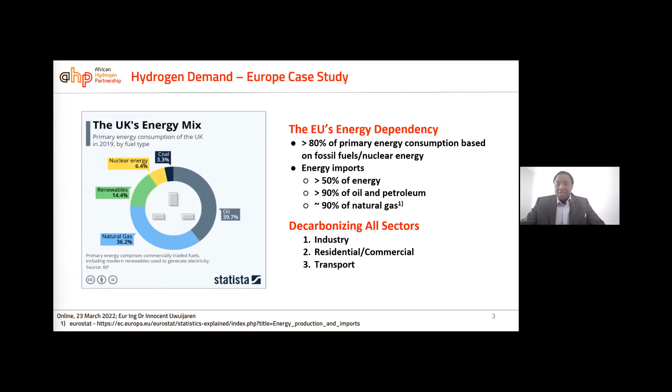All of this creates the opportunity that Africa has in its hands, which means Europe already has a demand. I'm setting the context of supply and demand. Europe already has a great demand on their table. The question is, can Africa be a potential supply on its own to meet this demand? The answer is yes.

You may say, why hydrogen? There are other alternatives that could be used, like electric vehicles. But when you talk of heavy trucks, the potential of electric is quite low because it takes a lot of usage. For instance, if you're driving a heavy truck 200 or 300 miles, you're going to run into many instances where you have to charge.

But with hydrogen, the energy potential is more and can serve these trucks and all these heavy duty vehicles and the shipping industry much better, which means the potential in hydrogen is better than electric for heavy duty trucks, heavy duty shipping, transportation sections, heavy duty trains, and all this heavy duty equipment - they all need hydrogen to power those equipments.

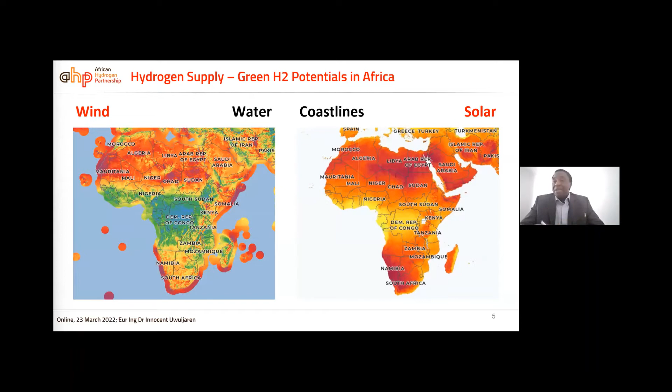That takes me now to the economic benefits. What are the benefits when it comes to hydrogen? Number one is low cost, price-competitive, carbon-free hydrogen. Of course at the moment the price is still on the high side - why? Because of the technology.

But we look forward to the future, say 5-10 years from now, where we can see the price of hydrogen coming as low as possible. In short, some of the different producers are already looking at opportunities of having a huge number of demand at a time, which can bring down production costs. That is actually what Africa should be looking at.

Each of the nations coming together to put together what we may call a unified order at a time, where the quantity and volume drives down the price. That could be an opportunity that Africa can take advantage of.

Also, we have natural hydrogen. Of course these need to be verified. Natural hydrogen is found in the ground - that's what we have to date. But the main study is still ongoing at the moment. With the proof of all those studies, we can understand more on the possibilities and potentials of that hydrogen, which I believe can be beneficial to Africa.

Now in terms of benefits, you can look at the domestic aspect. We can use it as a power backup system for Africa, and also for green fertilizers, green ammonias, and all these derivatives - they can all be valuable in Africa. So we're not looking only at import demand to other nations; we're looking at local use as well, where hydrogen can be very beneficial in application, and within African nations there can also be opportunity to export.

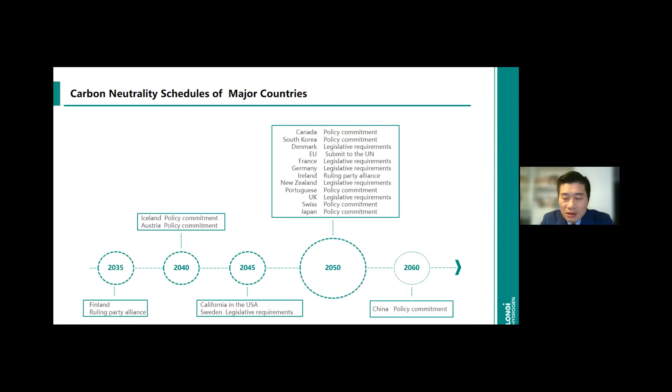Let's see the schedules of major countries of the world to accomplish carbon neutrality. Countries like Finland, Iceland, and Austria have a good environment and less heavy industry, so they take the lead with commitments by 2040. Most developed countries and areas set the timetable at 2050. For China, our policy commitment is carbon neutrality by 2060.

Countries with more than 17% of global GDP have formulated hydrogen energy strategies, among which China and Europe are the most active. China and the European Union take green hydrogen development as the main goal of their hydrogen energy strategy. China has set a goal of 80 gigawatts from water electrolysis by 2030, and the European Union has set 45 gigawatts.

Chile, Middle East Africa, and Australia will become major green hydrogen export markets in the future to meet hydrogen demand in markets such as Europe and Japan.

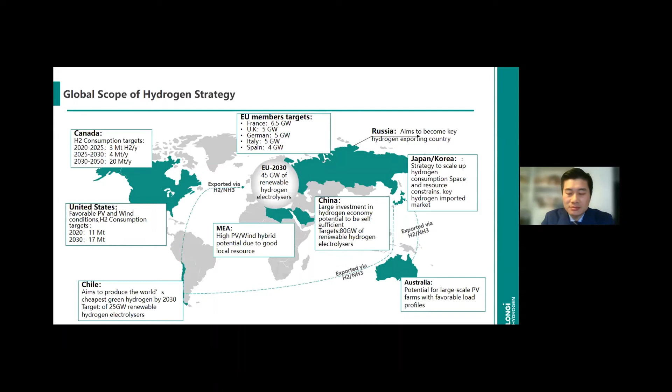Under the consensus of global carbon neutrality, hydrogen energy will make great progress as an indispensable clean energy. In China, the cost of hydrogen production from coal and natural gas is still relatively low. Hydrogen production by water electrolysis is subject to high electricity prices, so far it is still insufficiently economic.

However, we are seeing that as electricity prices continue to decline, the hydrogen cost of water electrolysis will become equal to traditional coal hydrogen production and natural gas hydrogen production. It is predicted that the ratio of green hydrogen in China will increase significantly.

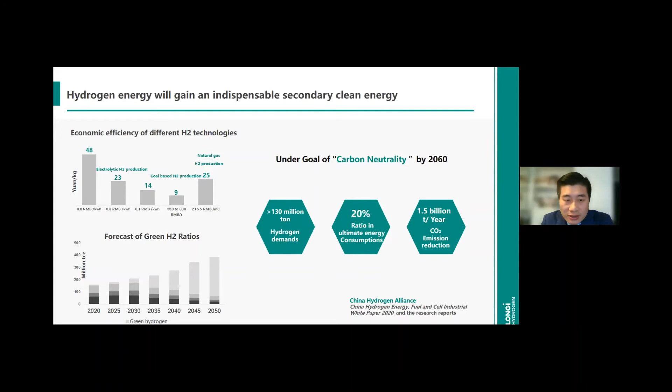Longi has been asked several times, as a world-leading solar company, why did Longi enter the hydrogen energy field? Longi thinks without hydrogen energy, it cannot enter the deep decarbonization process. You can see there are 10 billion tons of CO2 emissions in China every year, and the power industry alone contributed 40% of the total CO2 emissions.

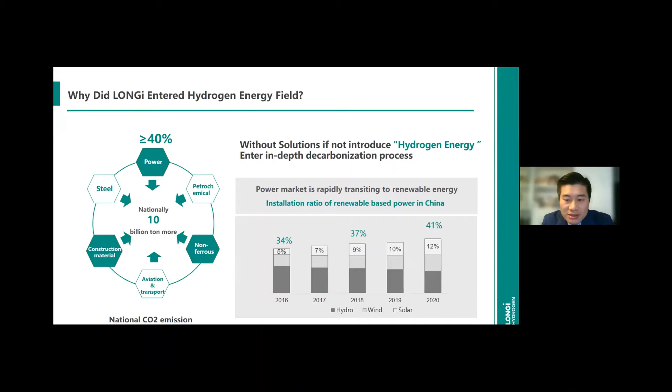China's government has already taken measures to adjust the structure of the power supply. The renewable energy installation ratio is rapidly increasing. In 2016, the renewable energy ratio was 34%, and by 2020, renewable energy achieved 41%.

In addition, how to solve the volatility and storage of hydrogen production from renewable energy is still a problem to be solved.

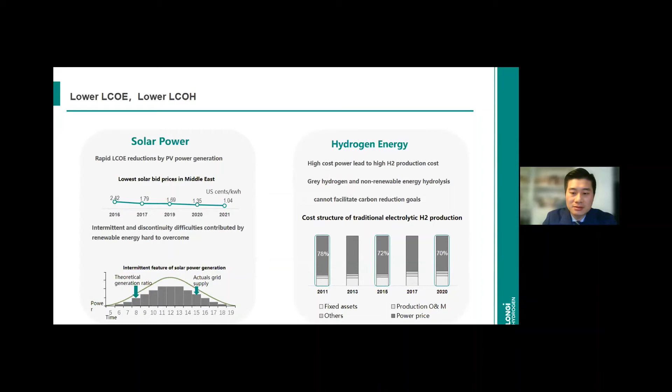At the present stage, thermal power still accounts for the main form in China's power grid, so it is impossible to obtain real green hydrogen through the power grid. As you can see, thermal power accounts for nearly 70% of China's power structure, around 80% in west China, and even higher in north China.

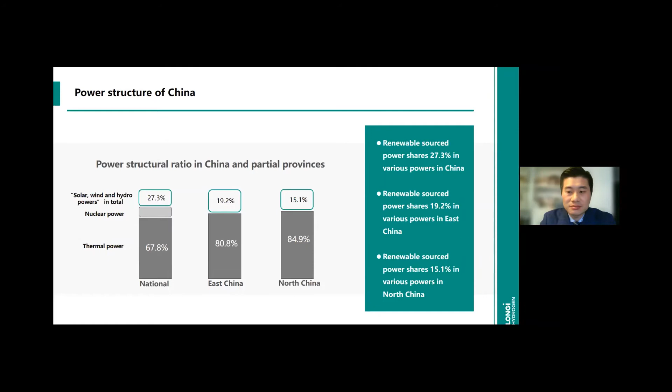And lastly, the comparison of CO2 emissions from different ways to produce hydrogen in China. First, we use coal to produce hydrogen. When producing 1 kilogram of hydrogen, it will increase 13.5 to 19.4 kilograms of CO2.

Second, we use natural gas to produce hydrogen. When producing 1 kilogram of hydrogen, it will increase 6.5 to 10.8 kilograms of CO2.

Third, we use grid power to produce hydrogen. When producing 1 kilogram of hydrogen, it will increase 42.5 kilograms of CO2. So the only way to produce zero CO2 emissions is to use renewable energy.

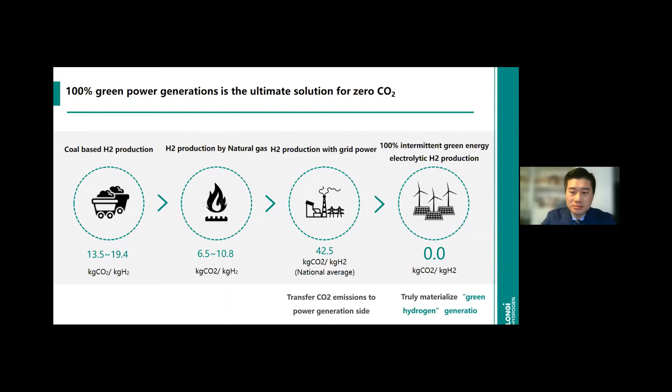So our vision is to be committed to becoming a world-leading company for hydrogen energy equipment. Since Longi's founding, we have been committed to developing green energies. In 2018, we set out in the hydrogen industry and carried out strategic research.

In 2021, Longi officially entered the hydrogen energy field to provide solutions for green hydrogen.

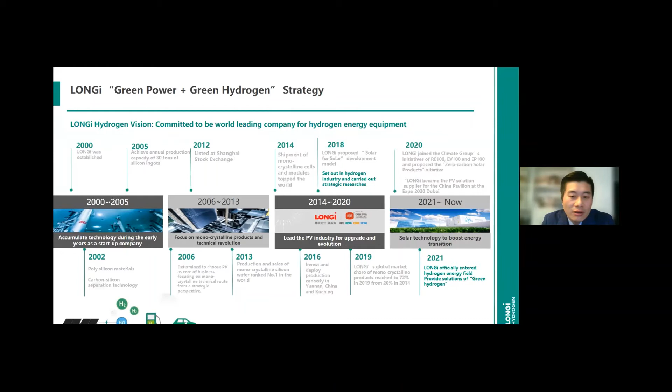It's a vision of green hydrogen production in petrochemical. In daytime, we use solar power to electrolyze water to get hydrogen to satisfy the requirements of downstream users. Meanwhile, to account for the instability of solar power at nighttime, a large scale of hydrogen storage is necessary.

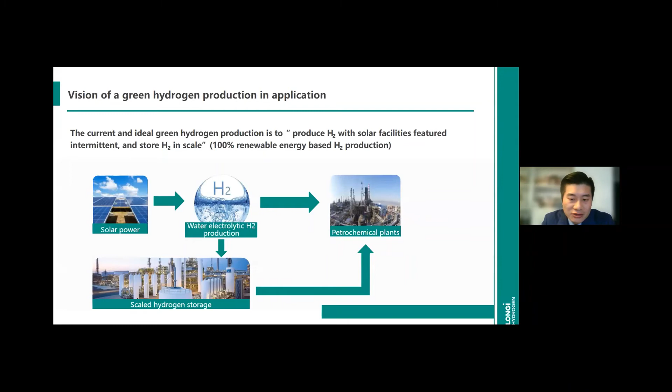Reducing the cost of photovoltaic and other renewable energy power generation is the core of obtaining low LCOH. In the past 10 years, Longi has reduced the cost of photovoltaic power stations by 80%, and there is still room for further decline in the future. In addition, we are constantly looking for various ways to improve power generation in the whole life cycle.

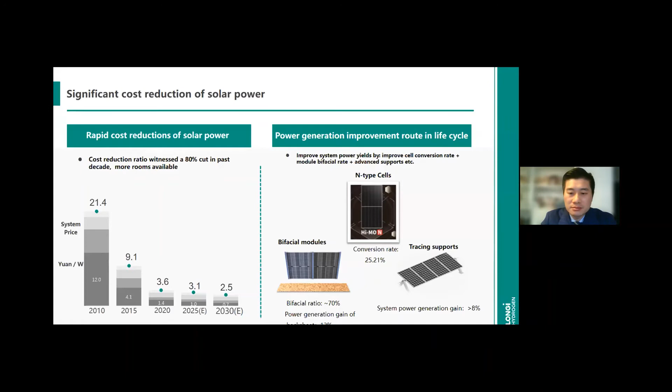The rise of non-technical costs restricts the continuous decline of photovoltaic power generation cost. Now, taking a large-scale ground power station as an example, the technical cost is only 1/3 of the total, and the rest is capital and income, land and operation maintenance cost. Control and reduction of non-technical costs will bring cheaper power resources for hydrogen production by water electrolysis.

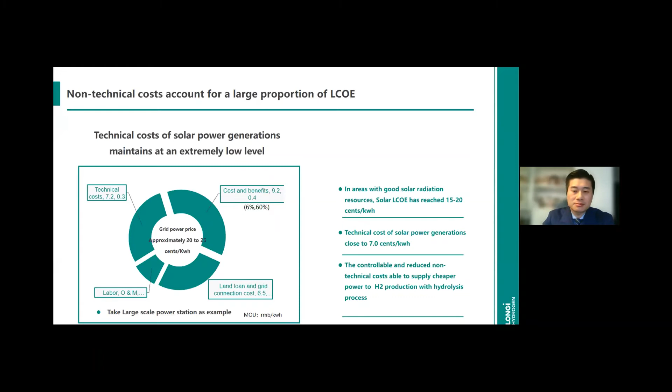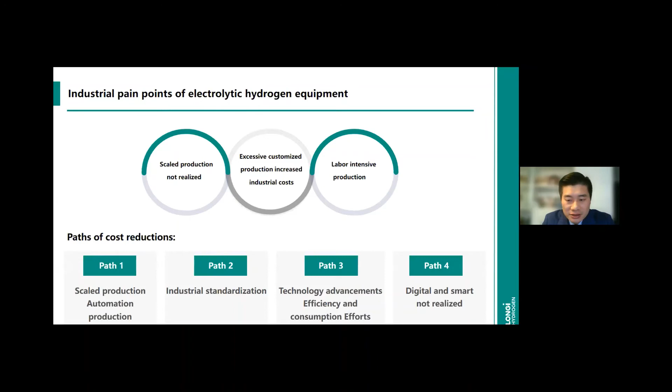Through investigation of the traditional water electrolysis hydrogen production equipment industry, it is found that there are several problems failing to realize large-scale production, including over-customization and manual production. Longi will standardize equipment design, production and manufacturing through large-scale automatic production. At the same time, by expanding R&D, we will further reduce the energy consumption of equipment and achieve safety, efficiency, and smart equipment production.

We have already manufactured 7 sets of 1,000 cubic meter per hour alkaline water electrolysis systems for our customer.

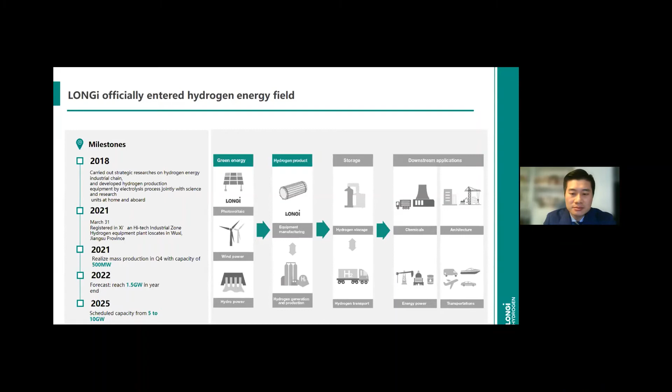Longi Hydrogen ALK equipment is committed to achieving the lowest LCOH. The modularized electrolysis adopts standardized production with a compact structure and high precision. The design of asbestos diaphragm is cancelled, which is more friendly to the environment. The single electrolysis capacity is 1,000 cubic meters per hour. The lifetime of the electrolysis is 200,000 hours, and the loading range is from 30% to 110%.

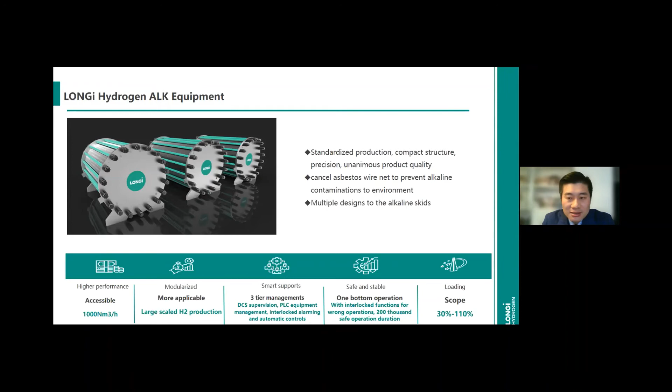This is our modularized gas separation unit and gas purification unit, which can be widely applied in different industries, such as petrochemical, power, steel, and transportation.

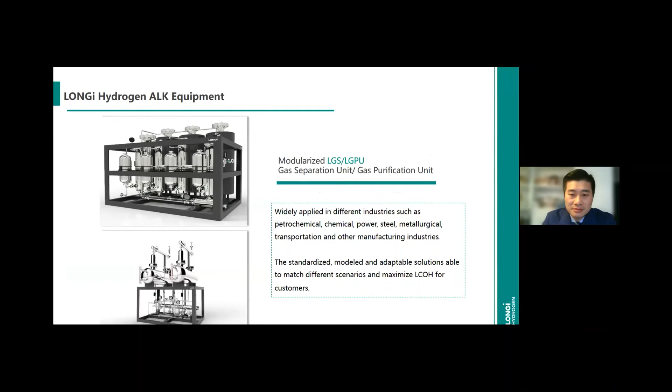Through joint development with domestic scientific research institutions, Longi has carried out innovative designs on the components of the electrolysis, which can make the single electrolysis unit have the largest capacity and low power consumption.

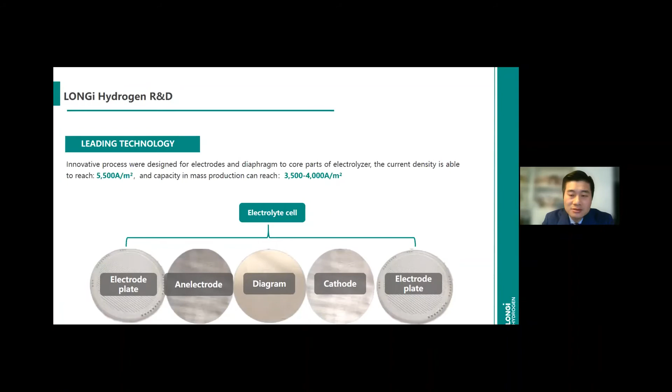I can show you the reference in China. On April 13th, 2021, Longi and Sinopec signed a frame agreement for strategic cooperation in PV and hydrogen energy areas. In November 2021, Sinopec launched the world's largest photovoltaic green hydrogen production project in northwest China. For this project, the total investment is $470 million, and the PV plant installed capacity is 300 megawatts.

The annual capacity of green hydrogen is 20,000 tons. The hydrogen storage capacity is 210,000 cubic meters, and the transmission pipelines have a capacity of 28,000 cubic meters per hour. So it's a very big project.

Lastly, Longi will build a sustainable ecosystem and promote the realization of the vision of a zero carbon Earth. Thanks all, that's my presentation.

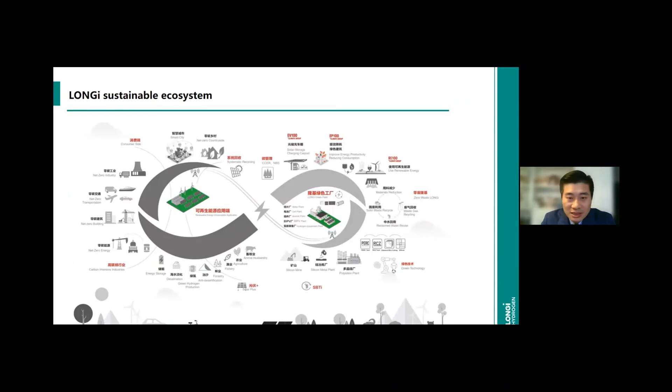Thanks, John. Thank you very much, Justin. Very interesting developments. We've been working with Longi for quite some time, always on the solar side, and now happy to see that there is another color, a green color on Longi's side.

I wanted to ask some more questions about the product. The first question is an honest question from me, just out of pure curiosity, because I always look at things from the angle of solar. In the solar space, we are used to having a certain lifetime for the panels and a guaranteed production based on the number of years. How is it with electrolyzers? Is there also a limited lifetime? Is there some efficiency decrease? Can you explain a little bit how we should look at the duration of an electrolyzer?

Yes, for the electrolyzer, maybe just three key pieces of information. One is the capacity of the electrolyzer, and maybe for lower LCOH, we can do a large stack for the electrolyzer. Maybe we now do 1,000 cubic meters per hour, but we are designing and we just found maybe 1,500 cubic meters per hour for one stack.

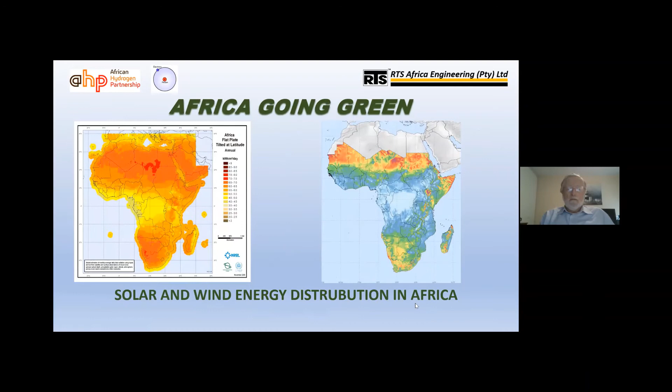Africa has got vast open areas with strong solar radiation and also wind energy. These two maps, I'm sorry about the top of North Africa being cut off on this map, but I couldn't find another one. This gives you some idea of the energy distribution in Africa. On the left, the solar energy, which is enormous, and the yellow, orange, and red areas all deliver better than 5 kilowatts per square meter, and the darker orange areas deliver better than 7 kilowatts per square meter. And that applies also to wind energy. Although it doesn't look so widely distributed, wind energy is in fact a very effective source of energy in Africa.

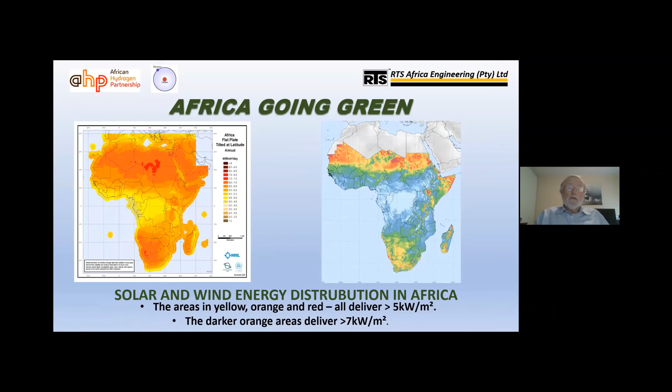But how can these initiatives be coordinated? Well, the African Hydrogen Partnership is going to be the pivotal organization in achieving that. It was formed at an inaugural meeting held in Addis Ababa in February 2020. There were over 40 delegates, representing private, public, and administrative bodies from Africa, Europe, and Asia. In fact, we were expecting a Chinese delegation, but this conference coincided with the outbreak of COVID in Wuhan, and so for obvious reasons, we missed the company of the Chinese delegation at that time.

But how can these initiatives be coordinated by the AHP? Well, it would be the primary driver for the uptake of green energy for the African continent.

Studies by the AHP have demonstrated that Africa can produce sufficient green hydrogen to satisfy all energy demands in Africa, plus a significant additional volume for export.

And how practical is this in practice? Well, Morocco is already exporting green hydrogen to Europe through a pipeline. The Port of Rotterdam has a major hydrogen terminal geared for the importation of green hydrogen in Europe. And Japan has indicated that she will buy all the green hydrogen that Africa can supply.

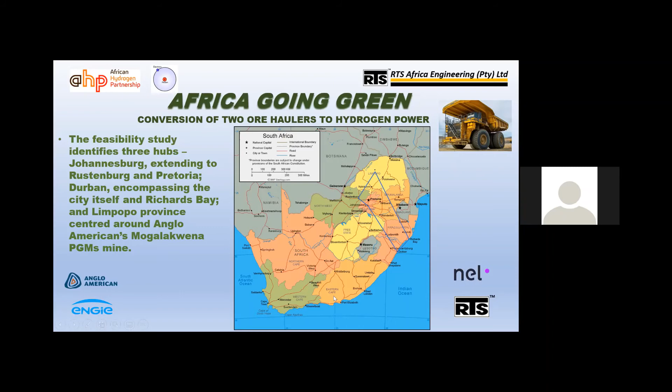A second initiative, which is a much longer term plan, has emerged from meetings and discussions within the African Hydrogen Partnership - we foresee the establishment of a hydrogen road all the way from southern to East Africa, where all road transport would operate on green hydrogen.

But this is all very well - whenever we talk about these things, and I think possibly our audience for this particular conference may not be suffering from this complex, but I've found whenever I speak about hydrogen, there is an elephant in the room. Everybody thinks hydrogen is extremely dangerous. They want to discuss Hiroshima and Nagasaki, and of course the dear old Hindenburg never fails to get its mention in these discussions.

Of course, most people listening to these conversations will understand that Hiroshima and Nagasaki were atomic bombs, and hydrogen is not going to explode atomically all that easily. The Hindenburg, sure, that was a simple, straightforward thermal fire, but it was definitely due to extremely incorrect and dangerous handling of hydrogen.

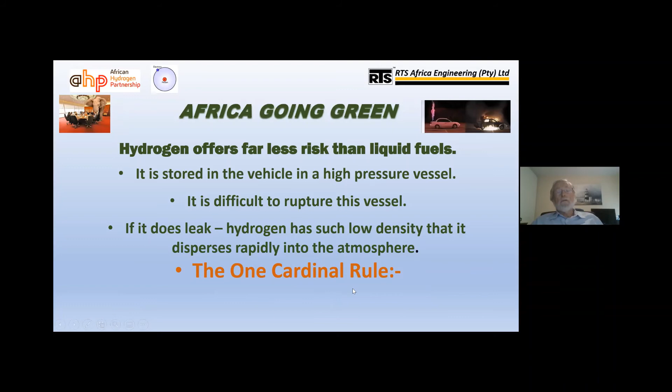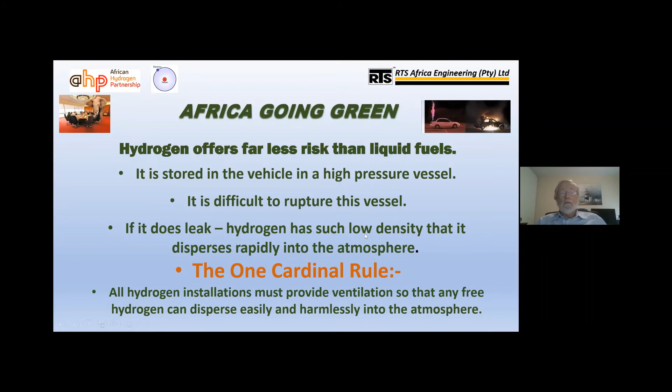This is one cardinal rule that we need to watch, and I'm going to leave you with this thought: all hydrogen installations should provide ventilation, so that should hydrogen leak, it can disperse easily and harmlessly into the atmosphere. Thank you for your attention.

In Africa, the future is definitely green hydrogen.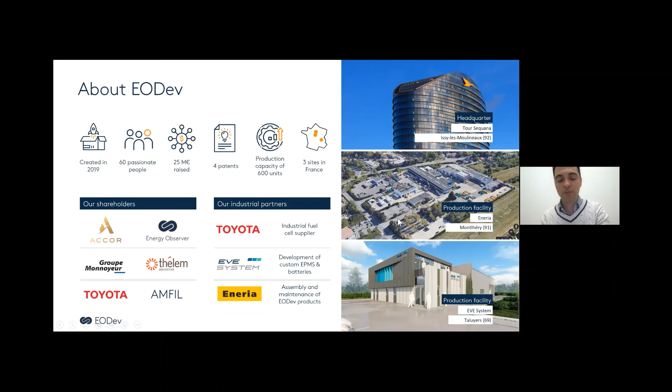So you see some of our shareholders: Accor, Energy Observer, Groupe Monnoyeur, Thélem Assurances, Toyota as part of shareholders as well, and AMFIL. As industrial partner, we got Toyota because all of our fuel cells are provided by Toyota, the same model used in Toyota Mirai cars, EVE System, basically for batteries and power management system, and Eneria, which is the production facility. Basically, our products are assembled there in the Paris area, and they will also be responsible for maintenance and technical support of our units.

This is basically the product that we'll be focusing on in this presentation. It's a zero emission power generator using hydrogen as fuel with an efficiency of 45%, so a very efficient product. It's a reliable one because we have tested the unit, the fuel cell, on the boat.

We have integrated this to the first customers, we have released the first units, we are in industrial phase now. It's easy to use, we have developed a totally plug and play solution. We are also supplying a pressure regulation box to adjust the pressure, and it's also scalable. So we are talking about a 100 kVA genset, but it can go up to 1 megaVA or more using units in parallel.

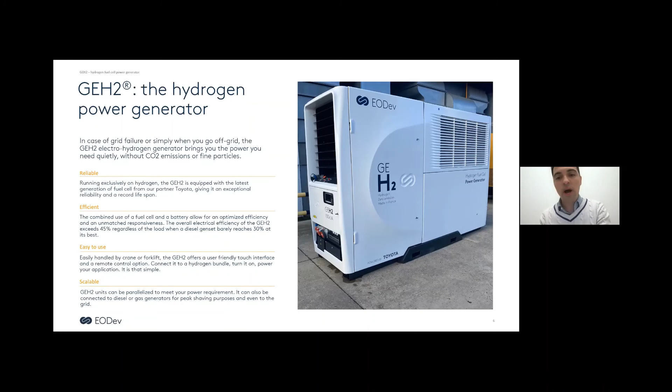So it's totally scalable. To provide you some additional information about the component and the technology - basically this is the pressure regulation box. As I mentioned, it's a plug and play solution. The customer only needs to have a hydrogen storage system, and then connects the bundle to this pressure regulation box.

We drop the pressure to around 11 to 15 bar, and then connect it to the gensets. We use the hydrogen inside of the fuel cell - this is the fuel cell compartment. As an electrical chemical reaction, from the oxygen and hydrogen, we produce electricity. So there's no combustion. There are no moving parts, which makes this equipment very silent compared to a diesel genset. As an output of this chemical reaction, we just have water and heat in the outlet.

So there are no carbon emissions, no NOx involved. We only have water, which can also be reused - it's hot water, not drinkable, but can be reused for toilets, etc., and heat in the outlet.

So you see here we have a hybrid solution basically between the battery and the fuel cell. The battery is 44 kilowatt hours that we have inside of it, to have instant power and also to manage the overall efficiency of the product between the battery and the fuel cell.

So basically the fuel cell recharges the battery when we have a lower consumption. When we turn the equipment on, it's the battery that takes the lead and takes the charge, and then we recharge the battery as we go on with our power management system. So it's a totally autonomous and intelligent system to manage the power.

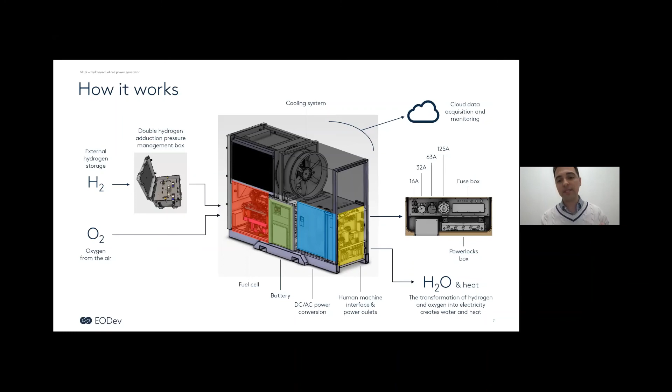It's also important to mention that it's a connected system - we have a 4G SIM card inside of it and different sensors, so we collect all the data. The customer can check the power consumption, the hydrogen level, the temperature of the fuel cell, temperature of the battery, and error logs. So we can also do predictive maintenance before the unit breaks down and we can intervene. This is really a great function.

Now, some more information about the project we have in Nigeria. We're going international now - we have closed deals with different distributors worldwide, in Canada, in Australia, but also in Nigeria with our distributor Buserve. And we have a project - I'm not mentioning the name of the company or the exact site because this is still quite confidential, but basically it's to replace diesel gensets.

As you might know, in Nigeria most customers use diesel gensets as a major power source. So right now they're using diesel gensets and looking for zero emission solutions, and we are trying to provide the GEH2 to replace these diesel gensets, to provide a zero emission solution for this customer.

They have a requirement of around 1 megawatt per day, which is quite massive for this industry sector. They are using these gensets 20 hours per day, and require that as prime power in constant usage. The hydrogen daily requirement for this project is around 2.5 tons per day, which is also quite massive if you consider the hydrogen production facilities we have today.

And here you can see the picture of our pre-series assembly line in France, and also the possibility of stacking the units. So for this unit, we are considering an average of 29 GEH2 units to provide this quantity of power, and they can also be stackable. So basically that's the solution we are providing.

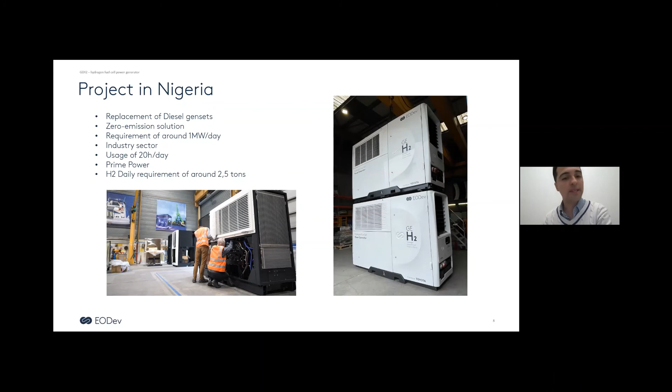This is important for you to know about the application and the possibilities. Right now, we can replace diesel gensets with these units with no emissions, no pollution, and no noise. That's the solution we're providing to customers in Nigeria. This one is more a concrete project, but we're also in touch with different customers from telecom and other sectors looking to replace their gensets.

Some more information about the product itself: here are the dimensions, and the total weight, about 4 tons each. We have 100 kVA power gensets with this voltage output, 400 and 230, and we're going to have 480 volts by last quarter this year. We can work both in 50 or 60 hertz, and regarding temperature, we can go from -15 to 40 degrees.

We are using the Toyota fuel cell, which is a proton exchange membrane. The battery is an EVE System, LifePO4, 44 kilowatt hour. To reiterate, no emissions, no NOx. Regarding noise levels, it's a very silent solution because we don't have moving parts or combustion inside, but the noise levels are still under test. We're checking official measurements from 1 meter and 7 meter distance, and also the volume of filtered air we're trying to measure right now. We might have that shortly.

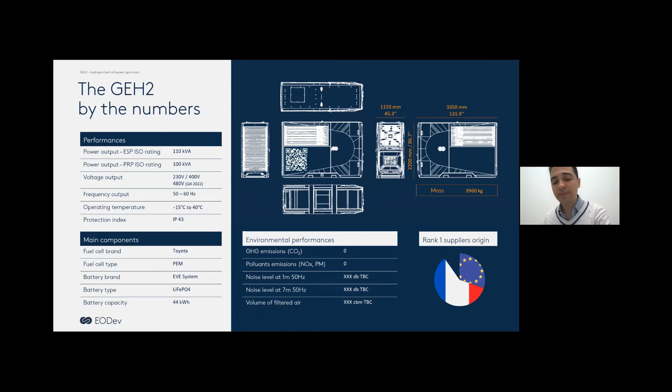Regarding suppliers, 80% of our components come from Europe. All of our products are produced in France, and even the fuel cell from Toyota is produced in Europe, in Belgium today. So 80% of components come from Europe, 60% from France. This is also important for us.

We have a good network of dealers today. As I mentioned, we have a partnership with a company assembling our units here in France, but also distributing and doing maintenance in the countries where they're present. Today in Africa, they're already present in Algeria, but also in France, Belgium, Luxembourg, Poland, Romania, Moldavia. We also have a distributor in Australia, Blue Diamonds, and in Canada, AKA Group. We're right now closing deals with different distributors in the UK, Netherlands, etc. The idea is really to go international and cover the whole world.

As I mentioned, we have our distributor in Nigeria for this customer's project I mentioned previously, but also additional ones that will be able to provide service and sales locally, which is Bullserve. We closed this deal with them a couple of months ago.

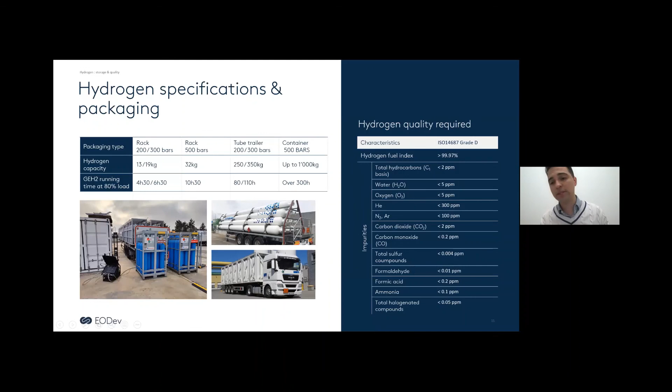That's basically the case we're considering for Nigeria, because they'll be consuming 2 tons per day roughly, so we need bigger solutions for hydrogen storage. These are the purity levels we need for the hydrogen to work, it's not any kind of hydrogen we can use for the fuel cells. The quality of the hydrogen is important, basically 99.97% purity is what we need for the units to work.

These are some events we've made to replace diesel gensets and show people during events that it was totally feasible to replace them, and that we have better performance because we have more efficiency. For diesel gensets we have roughly 35% efficiency, our units 50%. We've also identified that we have oversized applications normally. For this example, we replaced a 50 kVA unit, but at the end of the day, these are the graphs we supply to customers, and we see that we just had peak consumptions of 15 kVA.

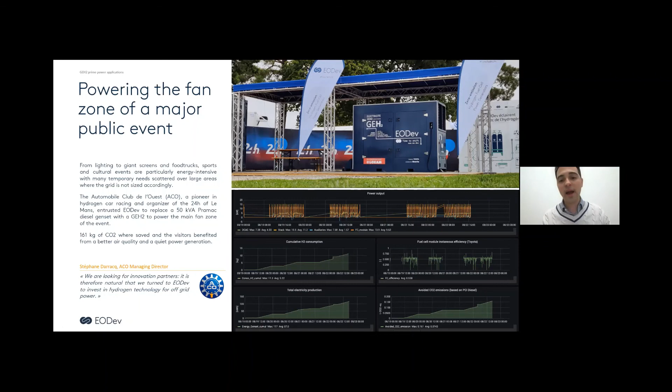So basically the 50 kVA they had before was totally oversized. This is also important to mention: the customers have access to all of these diagrams, so they can see the power consumption, the hydrogen levels, the battery they are using, and so on. So this is quite interesting.

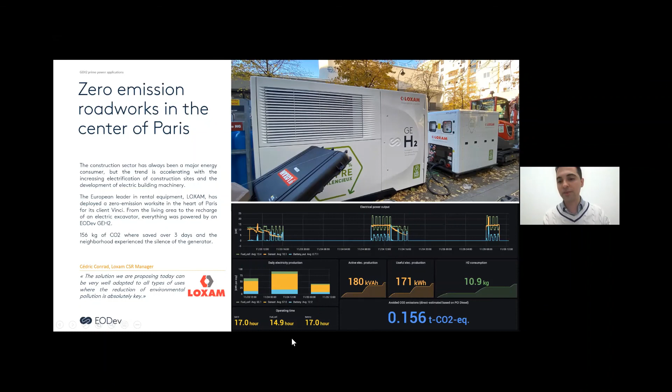I won't get into the details of this one, but it's important to mention that we also take into account the avoided CO2 emissions. For this example, used during 3 days at our unit in the heart of Paris, we did a demo and saved 156 kilograms of CO2 during 3 days. We also consumed 11 kilograms of hydrogen, which is something the customer normally has along with our unit.

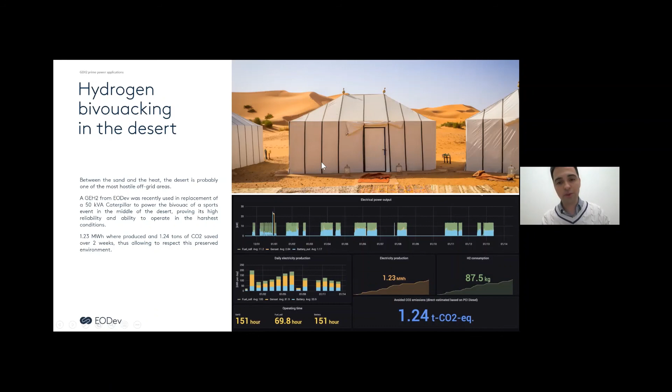We also did a demonstration in the desert in Saudi Arabia, where we consumed 1.23 megawatt hours and saved 1.24 tons of CO2 during this demonstration.

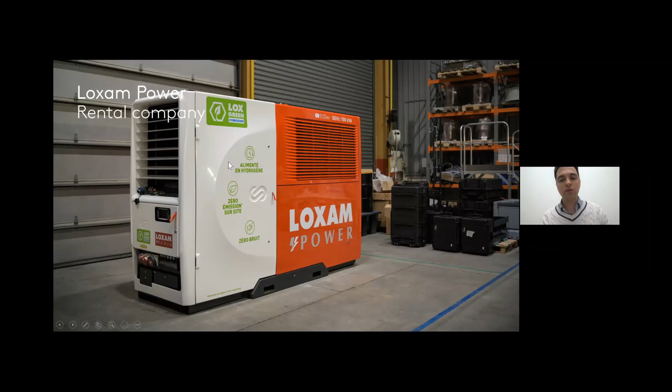We can also do customizations of the unit. This one was for Loxam, who bought one to rent out the units. This one is for Enedis, where we replaced the electrical network while they were doing works, providing power to around 50 houses in the French Alps. This was a great demonstration we made over 5 months, and it's still ongoing.

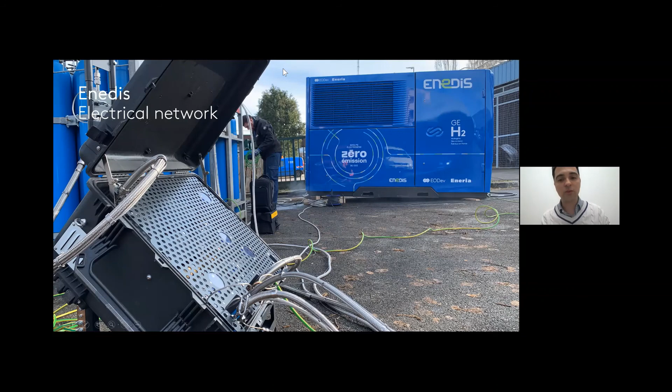So I'll stick to the time - that's the end of the presentation. I hope it was clear, and if you have any questions, I'm more than happy to answer all of them.

Thank you very much, thank you so much Fernando. Yes, it was very clear, and yes, there are many questions, so I'll just shoot them at you. Some are easy, some are less easy.

Amadou is asking what is the lifetime of your device, and lifetime and efficiency - is there a way to describe it? Yeah, sure. So basically for the fuel cell, that's the main component for which we estimate the lifetime in hours - it's 13,000 hours. It's not only the lifespan but the certified efficiency that Toyota supplies. We guarantee the fuel cell provides power with 50% efficiency during 13,000 hours. After that, we're going to have more heat than power in the outlet, but the customer can still use the unit - it's just that the efficiency is going to drop. We recommend fuel cell replacement after 13,000 hours. This is possible to do - it's not needed to replace the whole unit, only the fuel cell compartment.